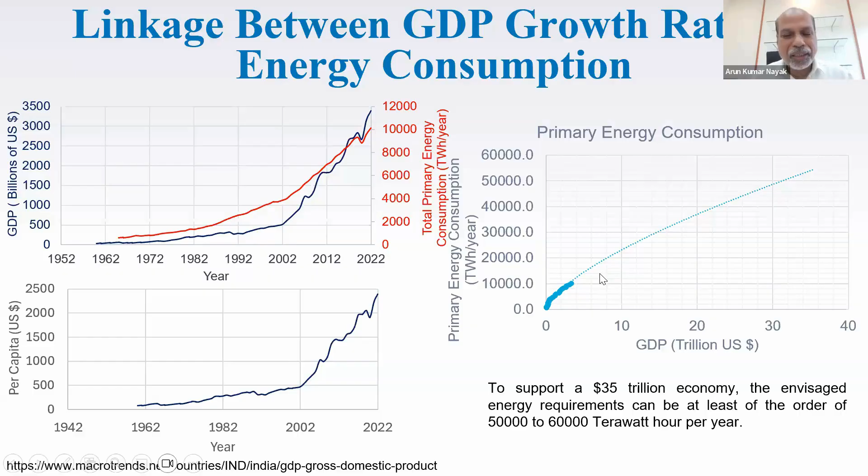If you look historically, no energy consumption has gone without CO2 emissions, and historically the GDP growth rate has also caused proportionate CO2 emissions. Globally, most countries consume even more than 70, 80, 90% of their energy budget from fossil fuels. So this is very critical. Globally we produce something like 60 billion tons of CO2 per year.

And it's well known that by the end of this decade, the 1.5 degrees Celsius limit is likely to be crossed. For the 2 degrees Celsius limit, Mother Earth can maximum accommodate 1150 to 1350 billion tons of CO2. If I divide that by 60, it is hardly 20 years. So 2025 plus 20 is 2047. So 2047 is a very critical year for India.

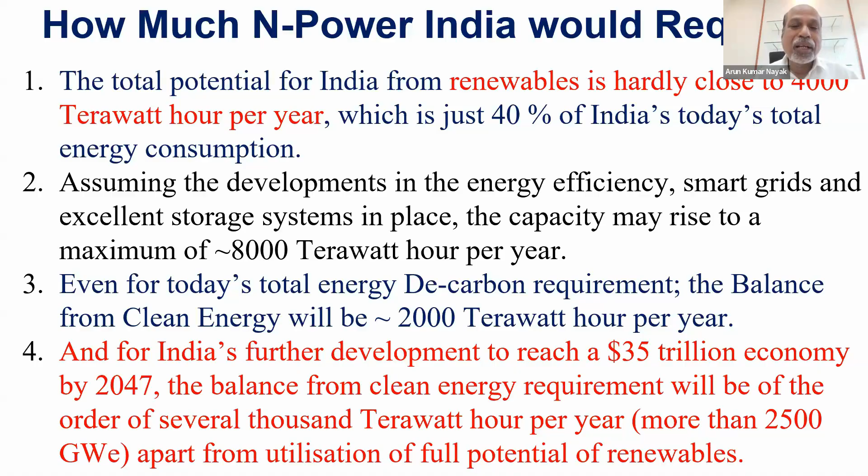It's a gateway to enter into a large scale nuclear power program. And there is a very big thing which is happening also in India. The coal plants, which are the drivers for electricity production today, are retiring too fast. By 2047, assuming the government doesn't create another coal plant in place of coal, roughly 200 gigawatt of coal electricity will be off the grid.

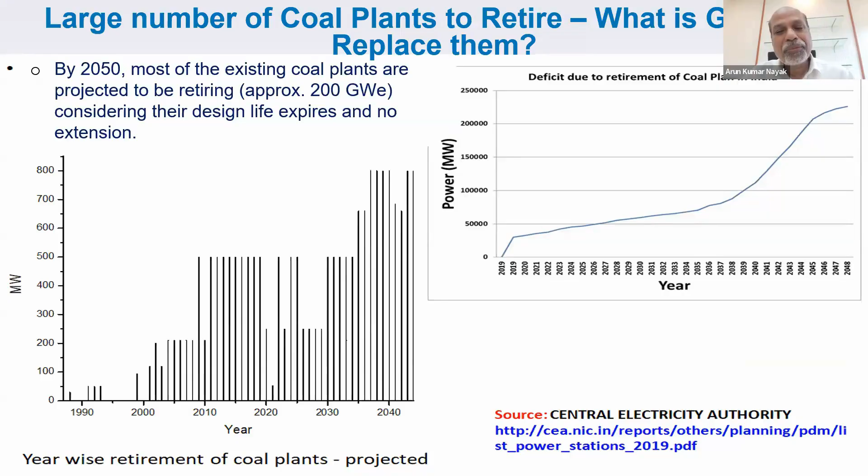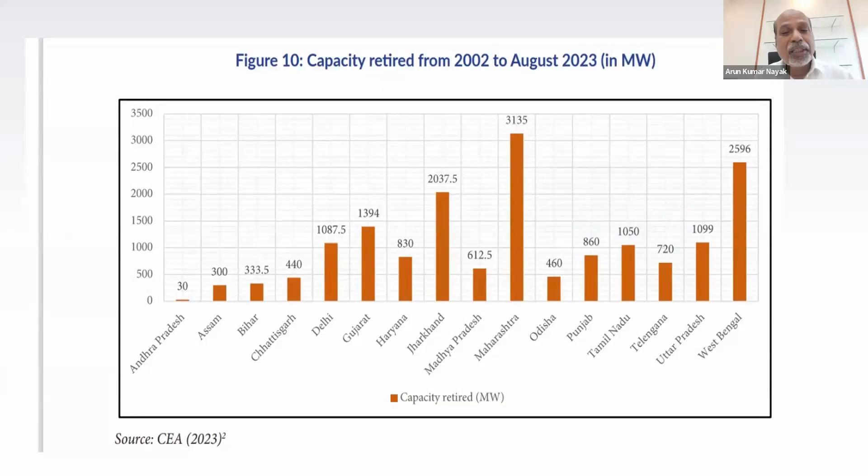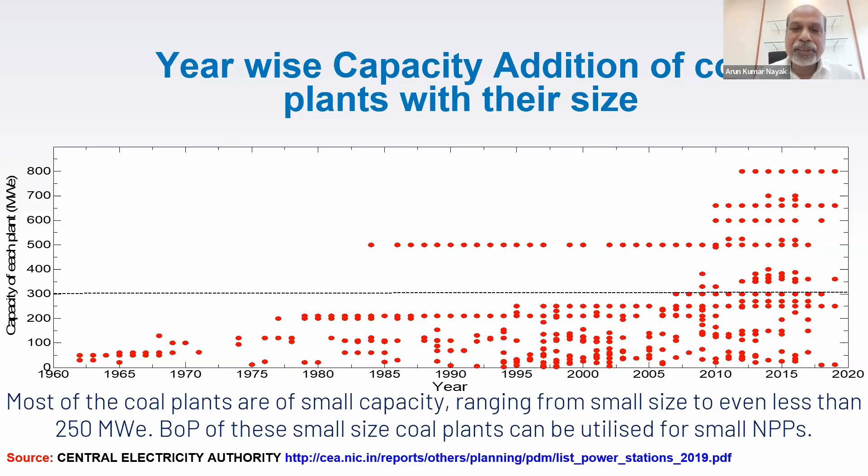This is something we have to understand, and it is not new. Look at states like Maharashtra, West Bengal, Jharkhand, Gujarat — many states, many coal plants have started retiring. More than 20 gigawatt electricity from coal is off the grid today. Most of these coal plants producing power are below 300 megawatt size. Only very recently have large supercritical designs come. Otherwise, large numbers are really very small size.

What is the American strategy doing today? America has surveyed more than 400 coal sites, and found that they could be home to roughly 200 gigawatt of nuclear, which has to be repurposed. Repurposing has a lot of benefit — by retiring them and reusing the infrastructure available there, they could repower, and that could save $275 million per gigawatt. This is something we all have to understand.

At the same time, what the American study shows — apart from the IAEA study — is that there is a good amount of employment generation for each megawatt of power we produce. 2.8 times more employment is created from nuclear as compared to coal.

Apart from this, let's understand what we think of a developed India. Look at the captive power plants which today provide energy to the steel, cement, chemical, metallurgical, mineral, textile, and mining industries. In the last 8 years, the power consumed by them has gone from 40 gigawatt to 80 gigawatt. For a developed India, or Viksit Bharat, the estimate is that power consumption in the captive sector alone could climb to as high as 400 to 500 gigawatt. Today they are mostly powered by coal and diesel. If we remove coal and diesel, only for the captive power sector, we need 400 to 500 gigawatt of nuclear.

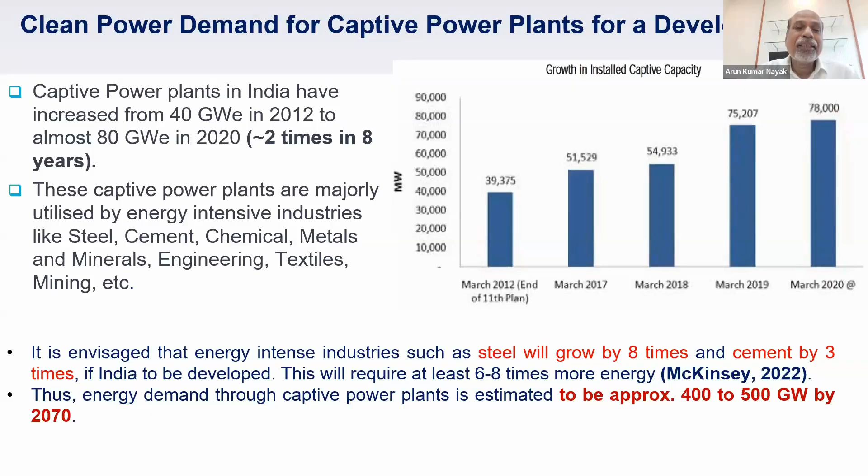Look at the transport sector — this is something I speak about in every forum. Look at America and India: in America, more than 90% of people go by flight; in India, 90% of people are waiting to catch a flight. Same thing with four-wheelers. So the energy consumption required in the transport sector could rise significantly as we move toward a developed India. In my estimate, a modest climb of 3 to 5 times in transport energy would require an energy system the size of India's entire current system, just for the transport sector.

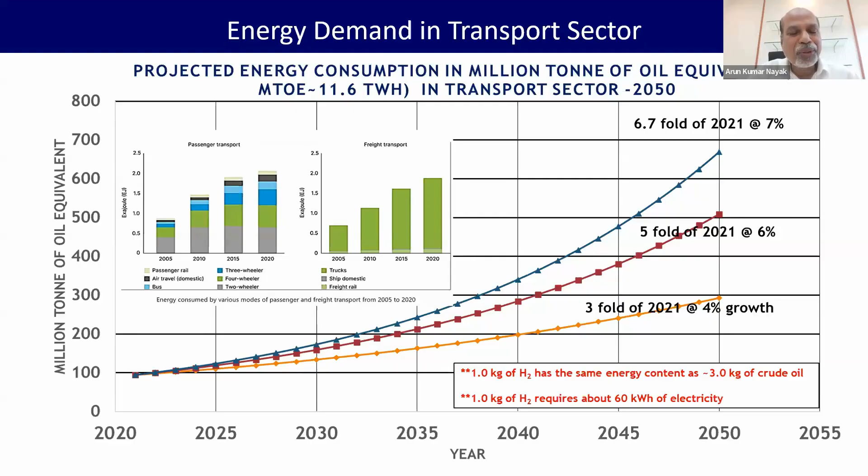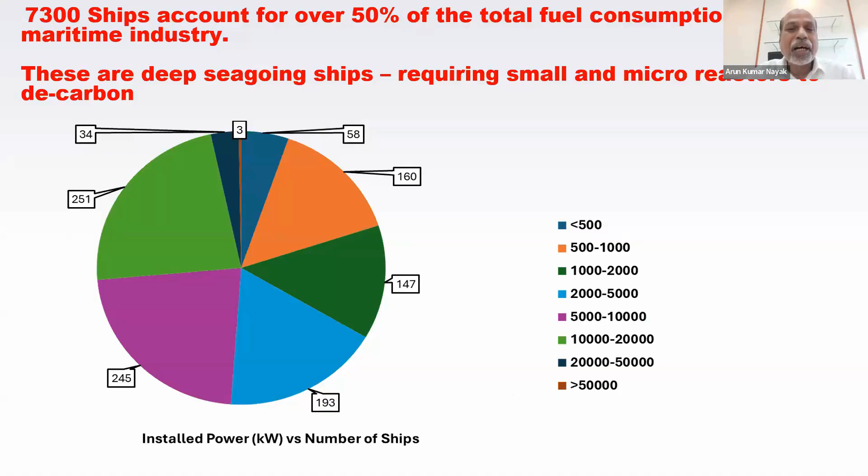Today the transport sector is mostly run by gasoline. If we remove gasoline, what is going to take its place? Either renewables or nuclear, or a combination of both — this is what we have to keep in mind. The other bigger sector in transport is shipping, the cargo ships. Roughly 7,300 cargo ships India is putting on the sea today, and they're all driven by diesel. The Minister of Shipping wants at least 5,000 of them to be decarbonized as soon as possible, using small and micro nuclear reactors.

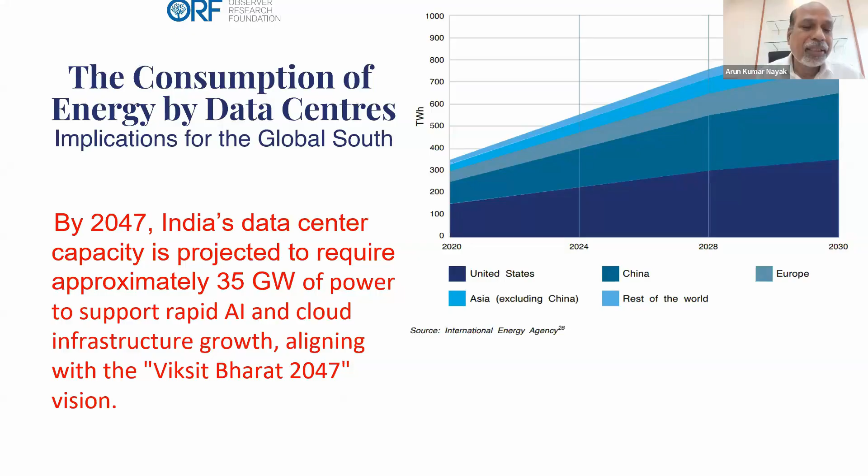AI and data — India wants to climb very fast to be a world leader, especially in AI. AI means power is a guzzler. In just a few years from now, India will require several gigawatts of nuclear power dedicated exclusively for AI and data. This we have to also keep in mind. This is something we all have to worry about.

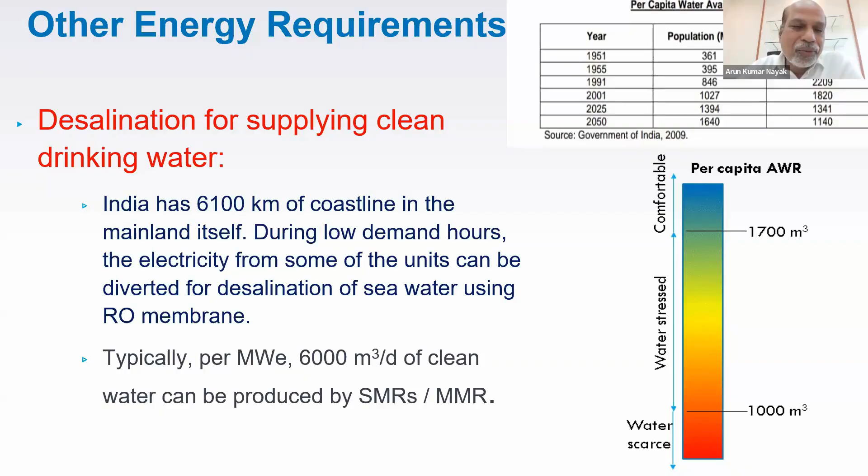In 1951, our population was 361 million, and today we are close to 1,500 million, and by mid-century will be 1,700 million. So the population is climbing almost 5 times from independence till mid-century. But the rain god doesn't increase the amount of water proportionately, so per capita water availability has shrunk exponentially. The UN says India will be water-starved very soon, and ensuring clean drinking water for 1.7 billion people will require a lot of energy — massive energy coming from nuclear.

So nuclear power, where are we?

As we all know, in India today there are hardly 25 nuclear reactors in operation, producing hardly 8.8 gigawatt, which is hardly 57 billion units of energy in an energy basket of 10,000 billion units. This is what we all have to keep in mind.

We are talking about 100 gigawatt by mid of the century, and developed India 2,500 gigawatt. So the future goal is very hard, very tough, very challenging, and we all have to tighten the belt even for 100 gigawatt nuclear power capacity by mid of this century. So what I say, this is a brave and a welcome step in the history of India.

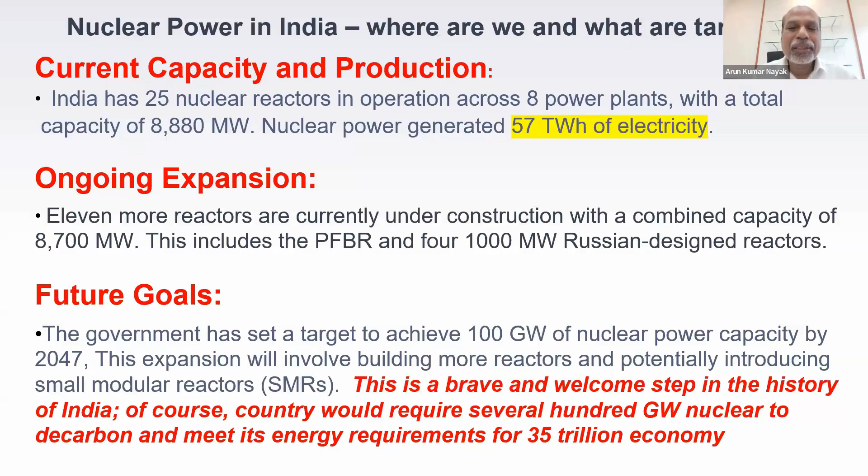This is a brave step by government, giving a big mandate to all of us that we have to climb at least 12 times from the present power production. And once that is climbed, a lot of technologies will be observed and that will accelerate the amount of nuclear power which we are talking about, several hundreds of gigawatt as we move forward.

What are the broader issues for nuclear? Why has it not been able to climb? The most important is the cost. What is the capital cost? The levelized cost of electricity.

Today it is totally government control. Even though the SHANTI bill gives the edge for the private sector to operate, to come, build, own, and operate, the biggest fear amongst the private is the capex or the electricity cost.

And the public is equally concerned about accidents, Chernobyl, Fukushima, radiation leak, cancer. So when we are pushing nuclear, the public mind is still not ready. There is not enough education with them.

The third bigger issue is the fuel supply security. Today we are also importing quite a good amount of uranium from abroad. So the private is totally worried, who is going to give me the nuclear fuel? Am I ensured? And we have a lot of thorium, and when is the thorium really going to come?

Management of nuclear waste - as we all know, each gram of irradiated uranium has to be stored for several hundred thousand years till the decay, till the radiation issues are resolved. So the question is, who is going to store so much waste, and what is the policy and so on.

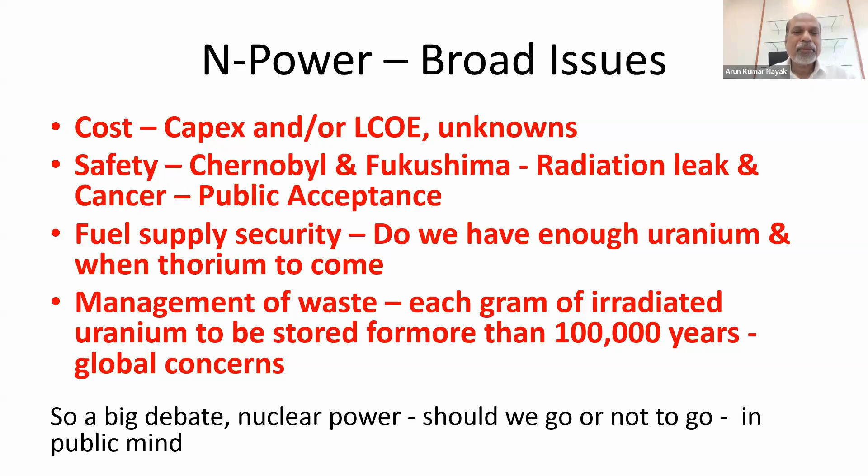Let's look at the technology issues or options for the private industry. Domestically, we have two technologies available. One is historically the PHWRs, the workhorse for India. India has mastered this technology up to 220 and 700 megawatt PHWR.

220 and 700 megawatt PHWRs are operational, lot of experience, supply chain well established, fuel design, fabrication well known, AERB licensing established, safety - it is a generation 3 plus design, especially the 700 megawatt reactor. So safety is well known, proven, and historically there has been no accident until now. These are the trademarks for the Indian PHWR program, which can be offered to the private utilities.

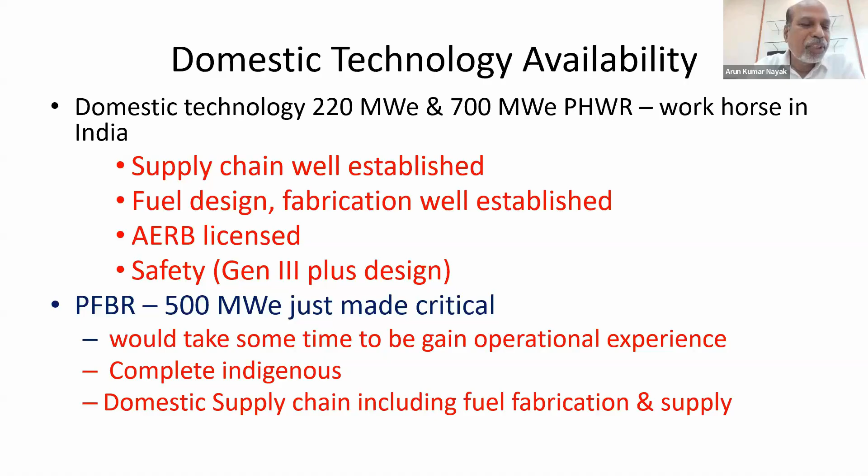And recently, India made history by achieving criticality of the 500 megawatt PFBR - a historic step, and of course it may take some time to gain the operational experience of the fast reactor. This is complete indigenous. And once it is operational, the bigger issue of the waste, the spent fuel, that is going to be resolved, especially because those fuel can be the spent fuel - we can reprocess, take the plutonium and use it in the PFBR.

Advantage for the private is that 100% domestic supply chain exists. The capex is known. The fuel fabrication is known. Everything is known for the PHWR.

PFBR, or in future the commercial fast reactors - the Department of Atomic Energy has to work out how this technology can be offered to a private player because of the use of plutonium in this fuel. Also, these are breeder reactors. So this is something we all have to think of, whether fast reactors can at all be given to the private sector. If yes, when and how.

Imported light water reactors, definitely - apart from the Russian one, the VVER-1000, now the VVER-1200, the private sector has the choice. They can negotiate with Russian, American, French, or even Korean vendors, looking at the techno-commercial viability and the supply chain aspects. These reactors can also be obtained by private utilities. The advantage for them will be the assurance of fuel supply by these vendors.

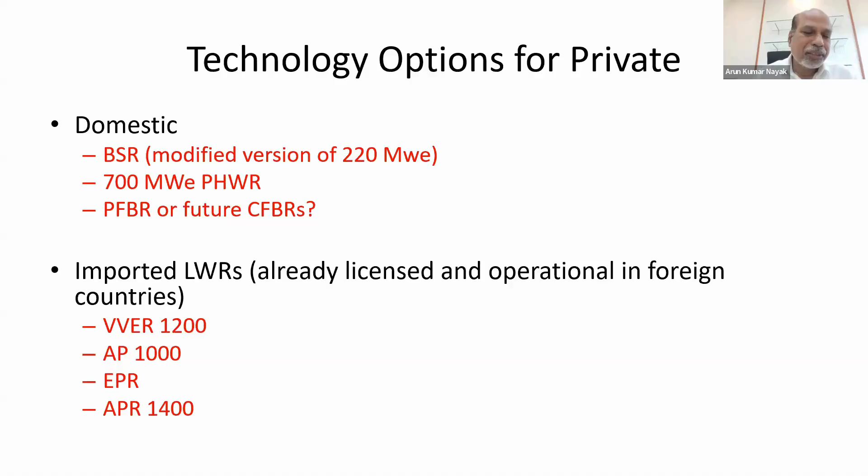But there are certain constraints or fears in the minds of private operators, especially since none of them, including PSU and NTPC, have any experience in nuclear reactor design, project, construction, licensing, operation, or maintenance. So entering into the nuclear sector, which involves highly advanced technology, they definitely require hand-holding.

The question is, who is going to provide this hand-holding, and to what extent? Will NPCIL give support, how much will they give, or who else is going to help them, and to what degree? This is a big question.

Foreign suppliers may give end-to-end delivery like a turnkey project, but the cost will be very high, and it's unclear whether the private sector is ready. For nuclear financing, many venture capitals today are ready to invest, but they don't have experience, especially knowing when to invest, how much to invest, and when they will get the return. These are unknown factors in the market.

The levelized cost of electricity is not well known to the private sector, because until now, the back end of the fuel cycle has never been considered in the LCOE.

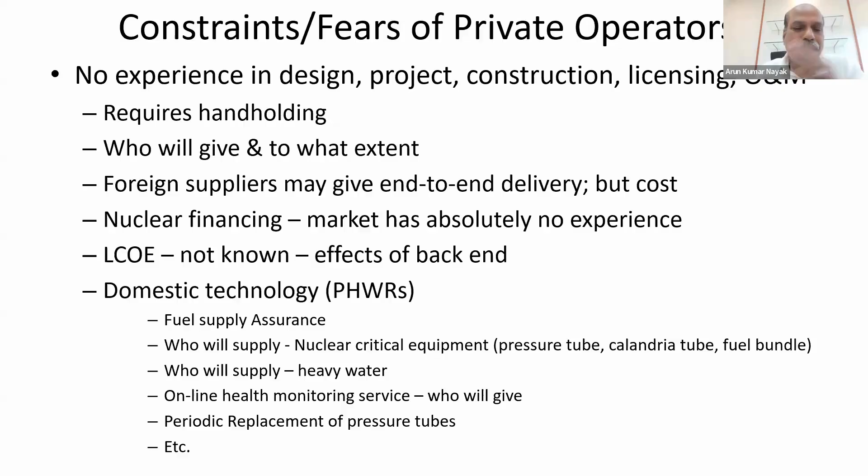Who will supply the heavy water? And who will do the online health monitoring of the pressure tubes? This is critical for PHWRs, along with periodic replacement of pressure tubes every 10 to 15 years. Who is going to do that, and who is taking the responsibility? The list can go on.

So implementation of 100 gigawatt, in my opinion, would require some dedicated setup or special purpose vehicle, especially to arrange and guide new entrants in the nuclear sector. This would help them with the right technology, siting, fuel supply, heavy water supply, critical nuclear equipment supply, localization, supply chain, nuclear financing, licensing, AERB authorization, international partnership, human resource development, training, radioactive waste management, small modular reactor technology innovations, deployment, investment, collaboration, and implementation for nuclear security and safeguards. This is something we need in the government to help private players or NTPC accelerate nuclear power. Let's have a break for question and answer, then we'll move forward.

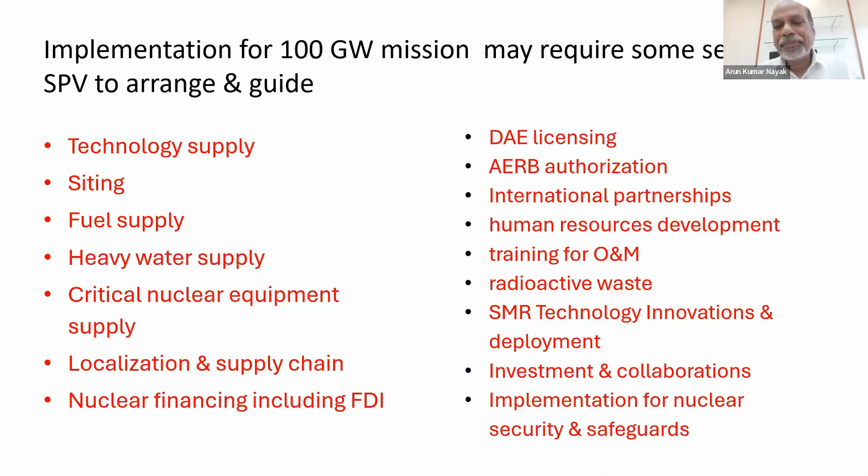Thank you, that was a wonderful build up of the program. You nicely laid out the requirement for nuclear energy, for clean energy, and keeping up with the CO2 emission cap. And as you pointed out, there are safety issues, but we'll come back to that at the end of the lecture after the second half.

Before we continue, as people are typing in questions, I want to quickly say something about nuclear fission. This whole field of nuclear energy started with the discovery of fission. One major point is that in chemical reactions you only get energies on the scale of electron volts, whereas the nucleus gives mega electron volts.

I'll tell a small story here. Otto Hahn and Lise Meitner discovered fission together, and it was a long journey to find the answer. When they finally found it towards the end of 1938, Lise Meitner was already out of Germany. Some of you may know this story, but it's a wonderful story of scientific endeavor, so I want to repeat it.

She was out on a walk in the Christmas break with her nephew, who was a physicist. She had received a letter from Otto Hahn saying that what he discovered as a product of neutron bombardment on uranium was definitely barium and not radium. During this snow walk, while pondering over the letter, she sat on a tree trunk, and the idea came to her that a neutron hitting uranium gives enough energy that uranium breaks into two nearly equal parts.

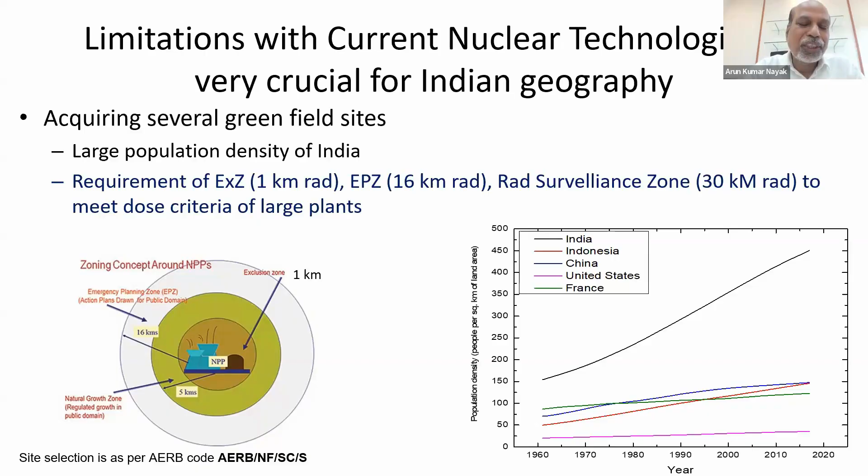Other issue: suppose we are talking about a 1,000 megawatt reactor, the project cost is very high. For example, with a modest 25 crore per megawatt, 2 units will cost 50,000 crore. Most of the very big private industries say we don't have such big pockets for putting 50,000 crore to build 2 nuclear reactors. This is one of the things we all have to understand.

So there's large investment because the size of the reactor is very large, and there is a lot of delay in construction, primarily because these are not modular. There are delays in the supply chain, some components come today, some don't. So construction delays are part of the game, and that causes almost 30 to 40% as interest during construction.

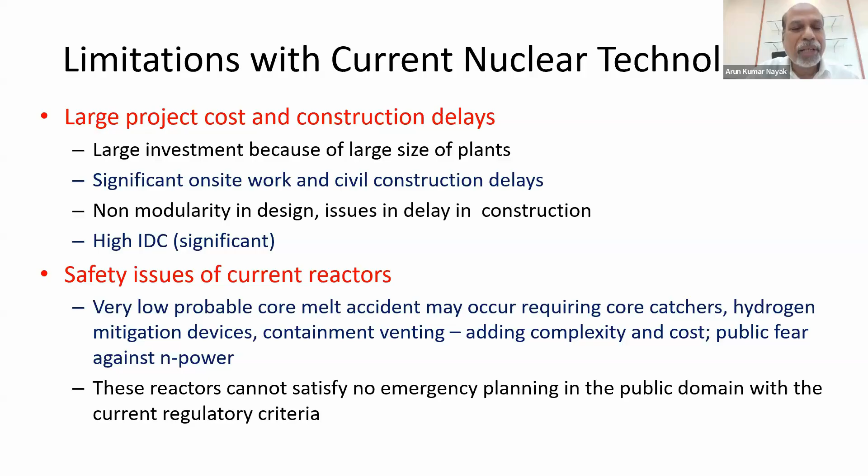Safety, I said, is excellent, but a low probability core melt accident may still occur. That's why most modern plants require core catchers, hydrogen mitigation devices, containment venting, and these numbers keep increasing, adding complexity and cost. The moment you say core melt, there is public fear in mind. That's why these reactors cannot satisfy the goal of no emergency planning - we always need emergency planning in the public domain.

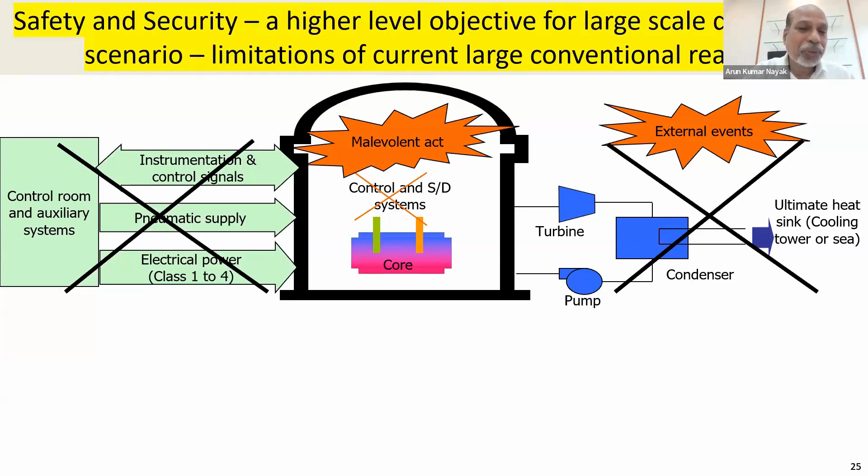Another very important factor, especially after the recent war, is safety and security - two very important aspects. Security means any external attack or internal malevolent act. A terrorist may enter the control room and try to jeopardize something, or there could be an external drone attack, missile attack, or rocket attack. We all have to be sure the reactor containment is safe enough to safeguard the plant, and whether the instrumentation control system works, the cooling system is available or not, safety has to be assured. This is something new nuclear reactors have to implement.

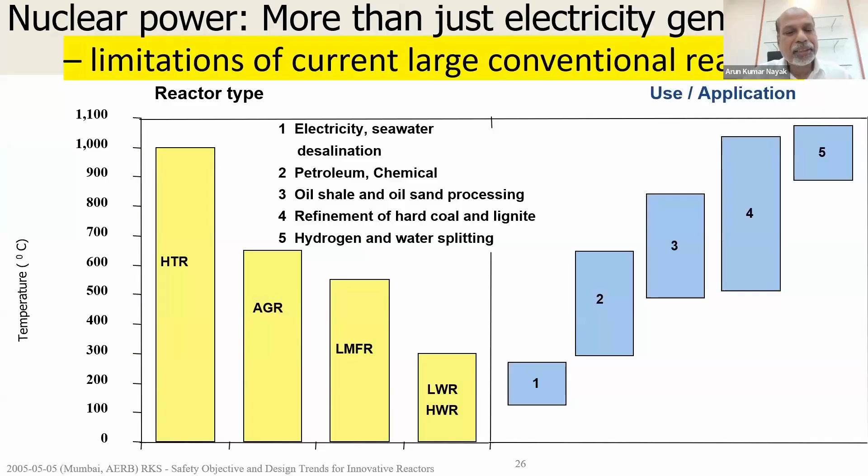Third thing is nuclear energy is not just for electricity production. Most industries today require heat or temperature, not electricity, because if you give them electricity they have to convert it back to heat. Towards that, new generation technologies like high temperature reactors, gas cooled reactors, and fast reactors have much, much higher temperatures than the classical PHWRs or light water reactors.

This is where the small modular reactors take a new game changer. Small modular reactors, size is small, power is below 300 megawatt. Modular because it is a factory assembled reactor, plug and play type. And reactor, fission energy is going to be transported here.

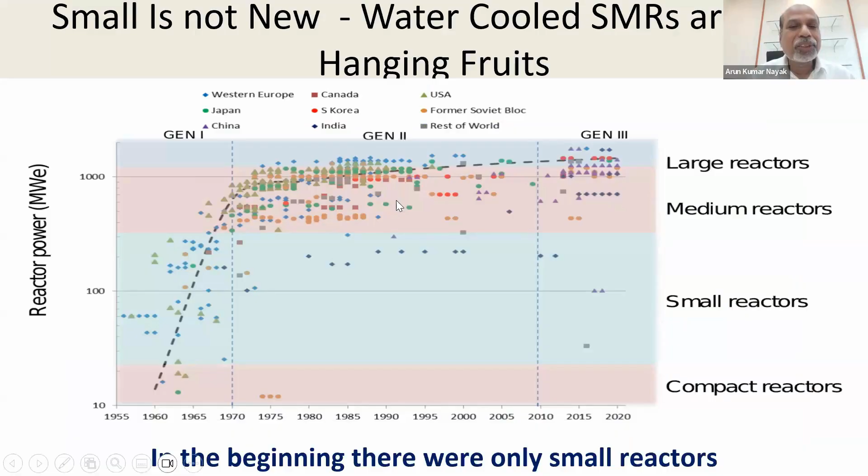But this technology is definitely different from the classical technologies which I described. Small is not new. In fact, the nuclear industry started only with small reactors. These are called the generation 1 and 2 reactors. Then there was thinking that we have to go for economy of scales, that's why the large reactors came. Otherwise, the industry has several years of experience designing, fabricating, operating small nuclear reactors.

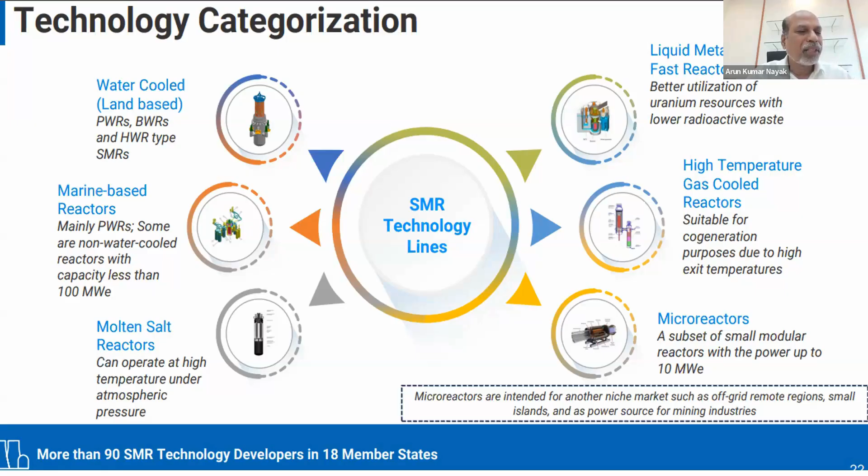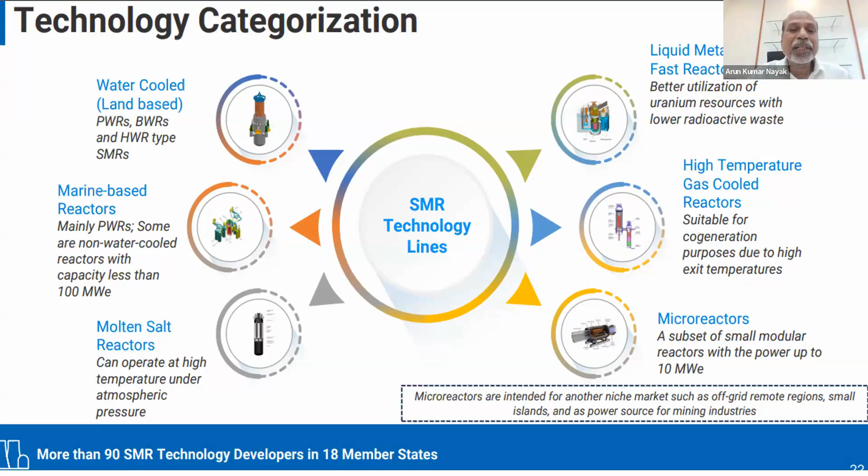What are these SMR technologies people are talking about today? Apart from the classical water-cooled land-based reactors, which include the heavy water reactors, BWRs and PWRs, and also for marine applications, which I just spoke about, 5,000 ships waiting for decarbonization. Similarly, advanced technologies like molten salt reactors, liquid metal cooled reactors, or high temperature reactors, including micro reactors sized less than 10 megawatt. These are something which are in design stage or some are in advanced stage for deployment.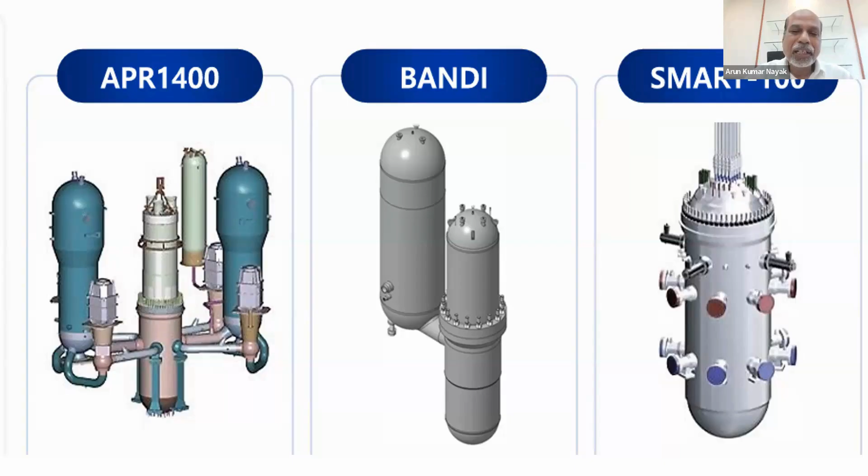There are no pipes in this. As a result, there is nothing called a break or a loss of coolant accident, which can cause accidents like what we saw in, for example, TMI or Fukushima.

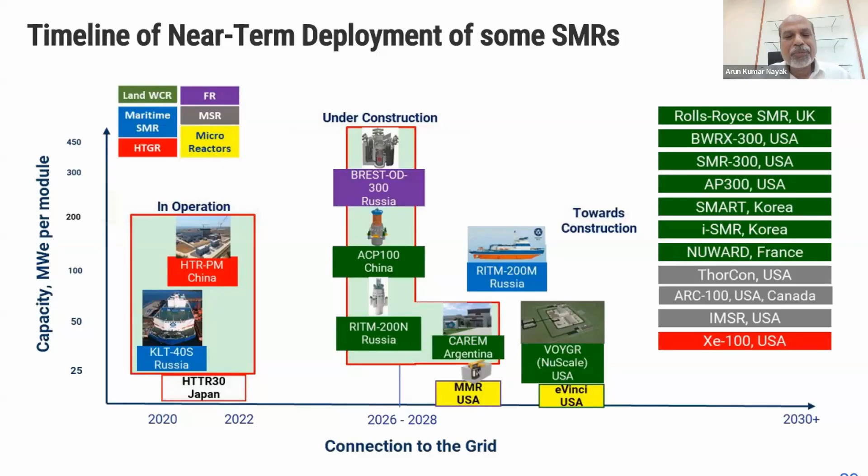And what are the timelines for deployment of these SMRs? Some are already in the advanced stage of deployment. Some are in operation. For example, the KLT-40 in Russia is already in the sea, operational. Japan's high temperature reactor is 30 megawatt size, operational. Chinese HTR-PM, which is a small size reactor, is already operational. Many are under construction, and some are going to be constructed in future.

How do the SMRs address the issues I spoke about, especially no emergency planning requirement? One very important factor we all have to understand is that since the size of the reactor is small, the radioactivity inventory is small. Plus, because everything is packed inside the vessel, there is no question of accidents like classical PWRs or BWRs experience.

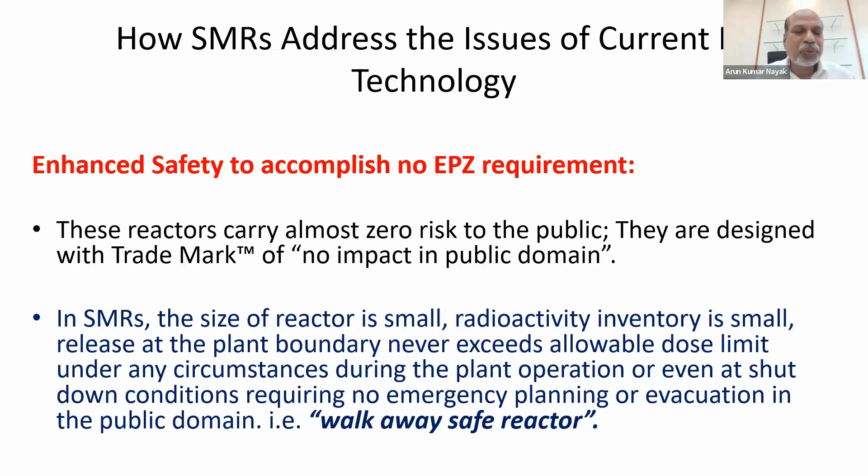As a result, there is no question of any radioactivity leak of magnitude which can cause an offsite emergency. So that is why these are tagged as walk-away safe reactors. In the sense, if any accident occurs, the operator can go home and take care of his family rather than taking care of his reactor. It will come to a safe condition on its own.

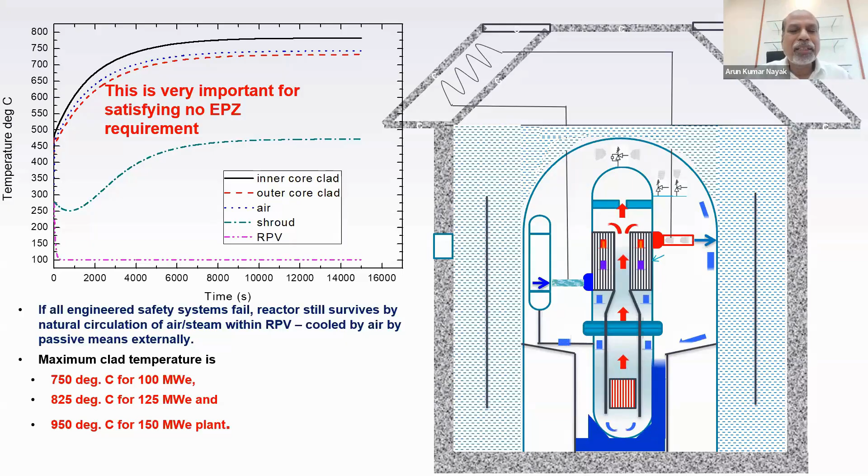One of the things, I myself had designed a 100 megawatt classical SMR, and if you see all the safety systems, even in a fault scenario, the maximum temperature the fuel sees is hardly 750 degrees Celsius, which is well below the melting point temperature of the uranium fuel. So this is where the SMR's safety comes into picture.

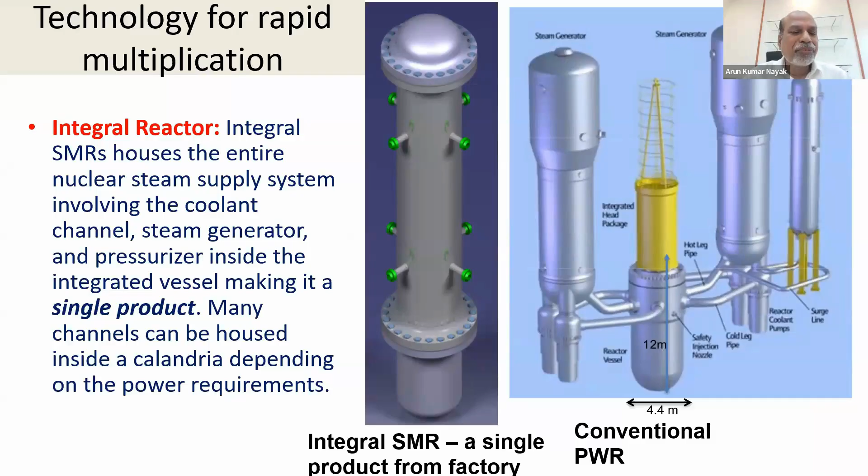And because these are integral reactors, this can be factory assembled as a single product, not like a conventional reactor. So many can be built in a factory and come for direct deployment. So this can have a rapid multiplication factor.

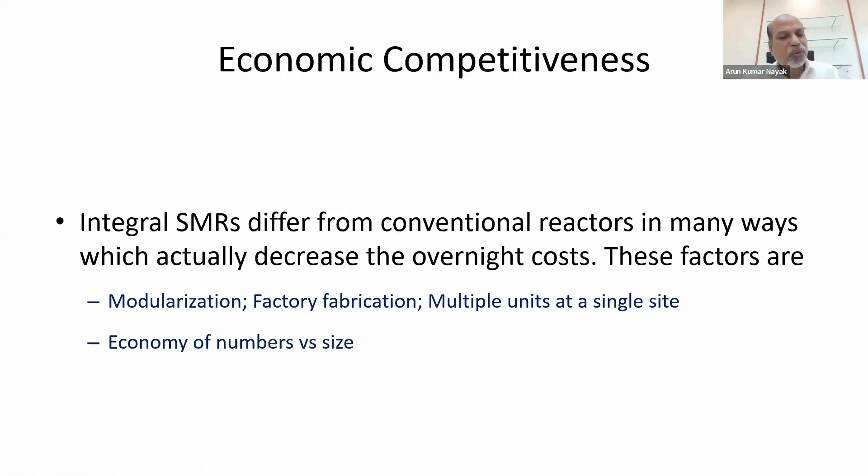Economic competitiveness comes from two aspects. One is the economy of numbers rather than size, and factory fabrication and modularization, as a result of which there are a lot of advantages, especially to new entrants. Suppose you talk about a 100 megawatt or 300 megawatt reactor, the amount of money they're investing is much smaller than the 30,000 crore which I mentioned.

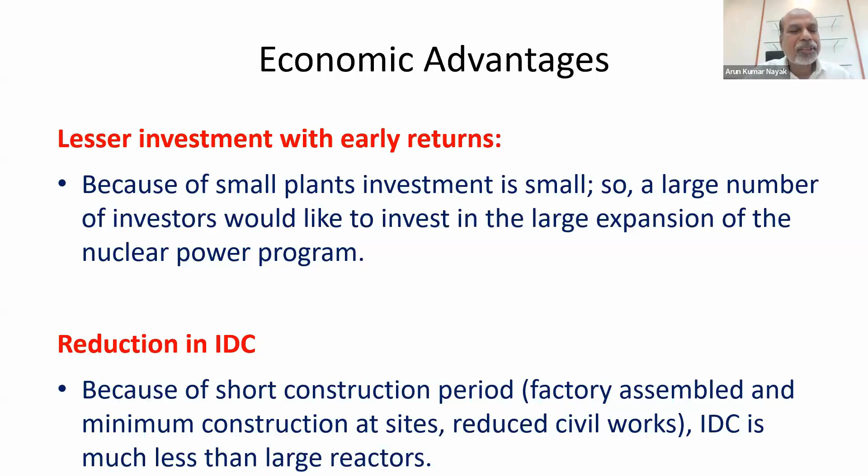So the pocket of these new entrants is sufficient enough to invest in these reactors. Because these are factory assembled reactors, the interest during construction doesn't happen, as a result of which this has economic merit. A lot of calculation has happened on this worldwide. The OECD calculation shows that even for a first unit, in Indian terms, the electricity cost could be 5 rupees 30 paisa per unit. And if you go for large numbers, it can be well below 5 rupees per unit.

For India, the next two slides are very critical. Whether we import these reactors from abroad or domestically design and manufacture them, there are a few things we have to keep in mind.

100% localization we have to keep in mind. That means all equipment components we should be able to manufacture in India. That only can bring down the cost.

These SMRs are not the candidates for greenfield sites. Greenfield sites will be kept only for the large conventional reactors. These SMRs will target exclusively repurposing coal plants. Coal plants are in interior India, so equipment has to be transported by rail or road. That's why the size has to be smaller.

Third thing is we have to ensure by design that under no conditions core heat up is possible. And that is why there is no requirement of any exclusion zone or emergency planning zone. The plant boundary becomes the boundary of the reactor.

There are a few other things to keep in mind. The design should be good enough that it can be sited anywhere. One important parameter for that is the seismic design basis. Classical large reactors cannot be put in a high seismic region. If you look at a coal plant, either it is sitting in a high seismic region or near a fault. So the design basis for seismic conditions for these SMRs has to be much higher.

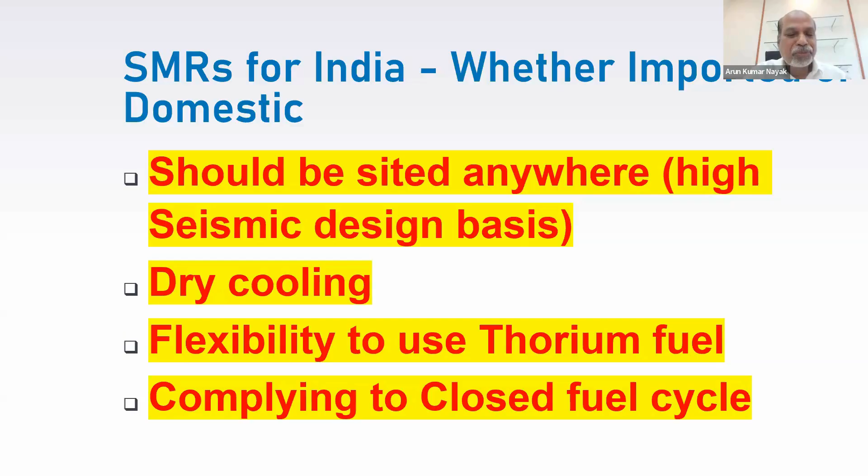As you go into interior India, getting river water or lake water is not possible because no state government will allow touching their water body for nuclear purposes. So dry cooling is a must. And as I've been saying, thorium has to be flexible enough to use, and most important is complying with India's closed fuel cycle.

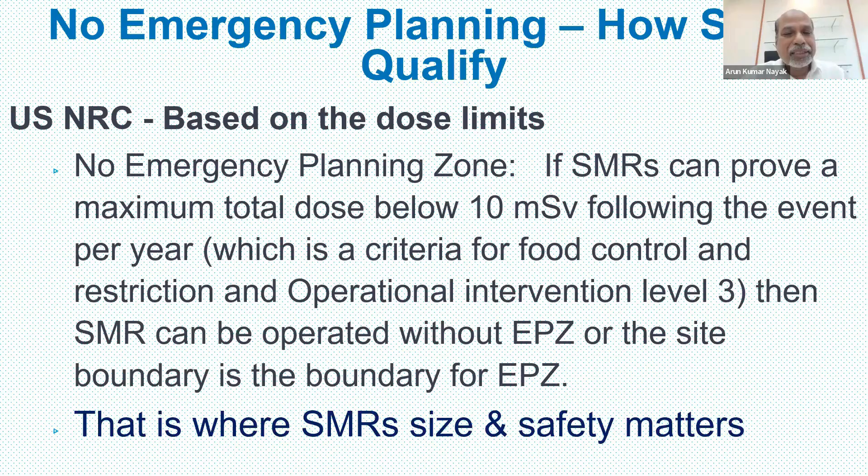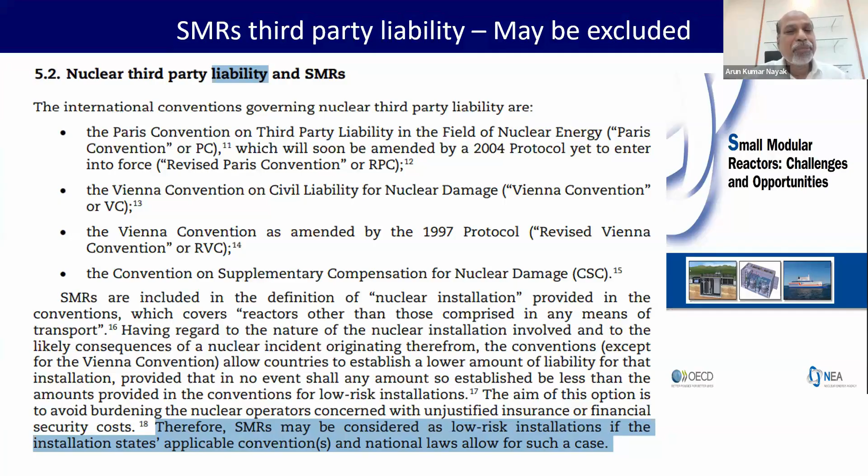What has the US NRC done? This is something I want to sensitize all listeners to, especially for SMRs, so that they don't require any emergency planning zone. They've put a dose-based criteria that under no condition, if the SMR can prove maximum total dose below 10 millisievert that a public person can experience outside the plant boundary, then it doesn't require any emergency planning zone. This is where I'm saying SMR design has to be completely different from classical large reactor design. Because it is so safe, even OECD countries are now planning to keep SMRs away from liability. Third party liability may be excluded for SMRs and microreactors.

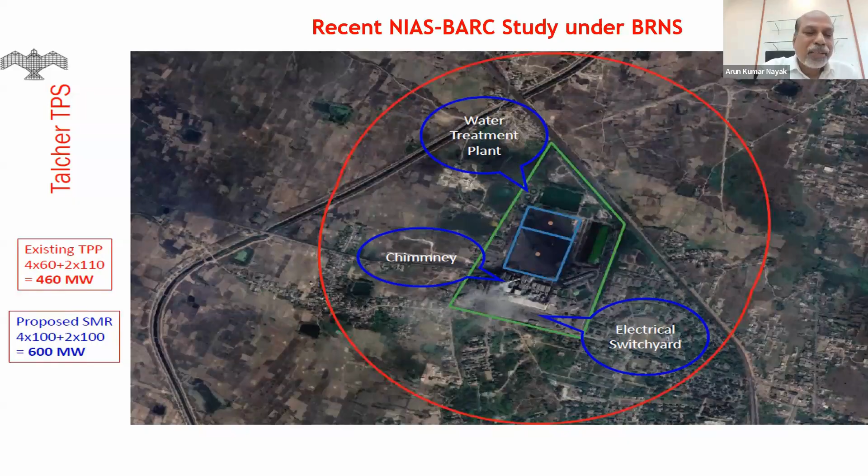What I did a few years back, I tried to map the SMRs, especially in coal plants of India for repurposing. Some I'm going to show here. Talcher Thermal Power Station produced 460 megawatt and has retired. In the same site, if SMRs can be put, it can produce 600 megawatt.

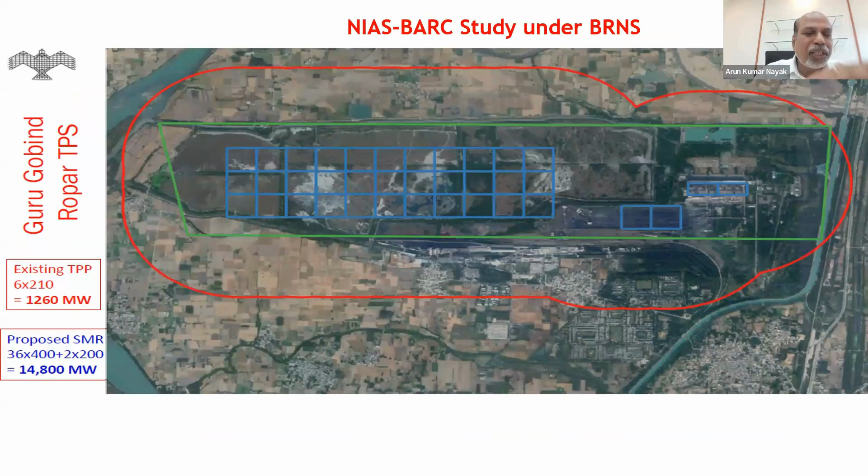Guru Gobind Singh Ropar Thermal Power Station produces 1260 megawatt. In the same site, I found an SMR park can be built of 14,800 megawatt. Nalco today consumes almost 1200 megawatt of coal to support its aluminum production. In the same site, I myself mapped and found that 1200 megawatt coal can be repurposed with SMRs.

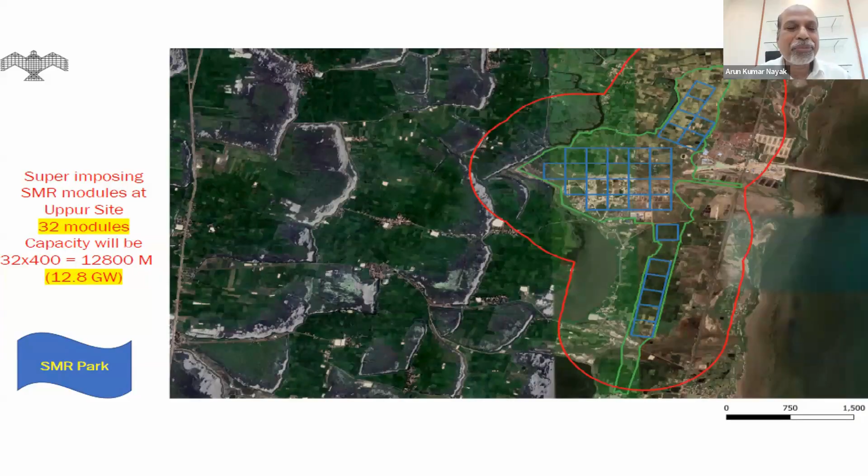South of India, there is a place called Uppur in Tamil Nadu. Once upon a time this site was given to NTPC to produce coal power, but for some reason this site could not be utilized. I mapped it and found that 12,800 megawatt of SMRs can be built here. There are many such stories, I don't want to go into detail. What I want to say is that SMRs can repurpose most of the retiring coal plants because there are several advantages.

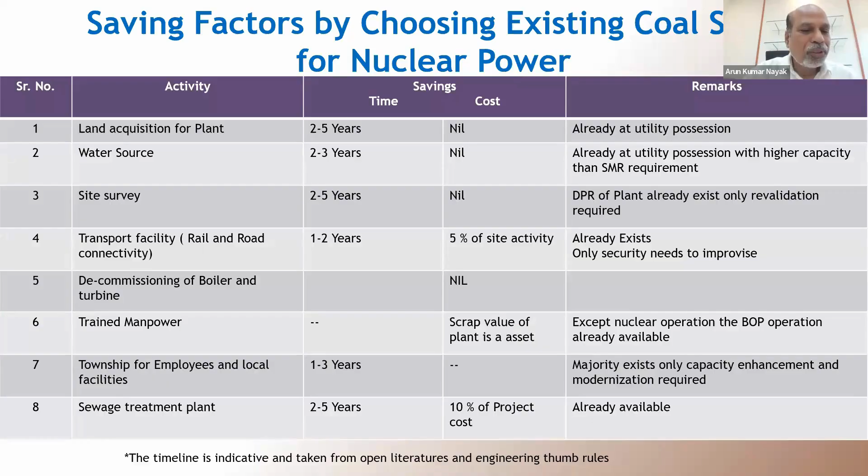One is land acquisition, we don't have to do that. Land is available, water body is available, site survey is completed, transport facility available, trained manpower is available, township is available. All these things will yield not only faster deployment of repurposing coal to nuclear, but also produce much more power than what coal was giving.

Apart from the classical SMRs I've spoken about, there is time to look more into smaller size microreactors of the order of 10, 20 megawatt. What is America doing? America is targeting exclusively for data centers, maritime industries, malls, hospitals, airports, across national highway corridors for hydrogen production. This is something we have to think differently about. Several thousand cargo ships need small size power, 10 to 50 megawatt size, we have to look into that.

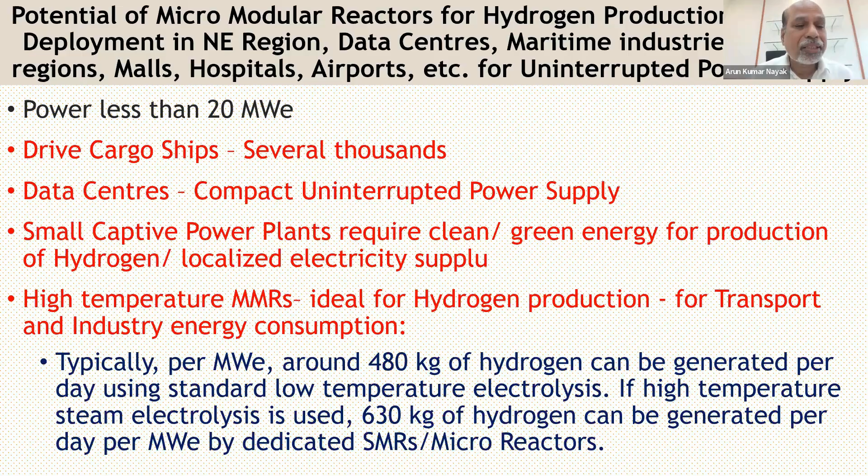Data centers will require uninterrupted power supply from microreactors, hydrogen production and so on. This is something a big industry can happen exclusively from microreactors. Most important, look at our northeast region, which is sitting on the Himalayan region. Classical large reactors cannot be put there. Even SMRs are difficult. I believe that region can be repurposed exclusively for microreactors.

Going to 2500 gigawatt as we move forward itself causes investment of $6 to $7 trillion, 1.5 times today's total India's GDP. And that will create millions of direct and indirect employment, apart from a lot of CSR activities. I believe a big transformation for Indian industry and Indian society is on the horizon.

Look, there is a big concern. What is the fuel? This is where Bhabha started the three-stage program. He understood we have very limited uranium, hardly 30 to 40,000 tons, which can support hardly 10 gigawatt nuclear electricity from PHWRs. And the first step has matured.

That's why he went to the second stage, that is basically reprocessing of the spent fuel, taking out the plutonium. And look, the second stage alone can give us 400 to 500 gigawatt nuclear, a huge amount of power is envisaged from the second stage.

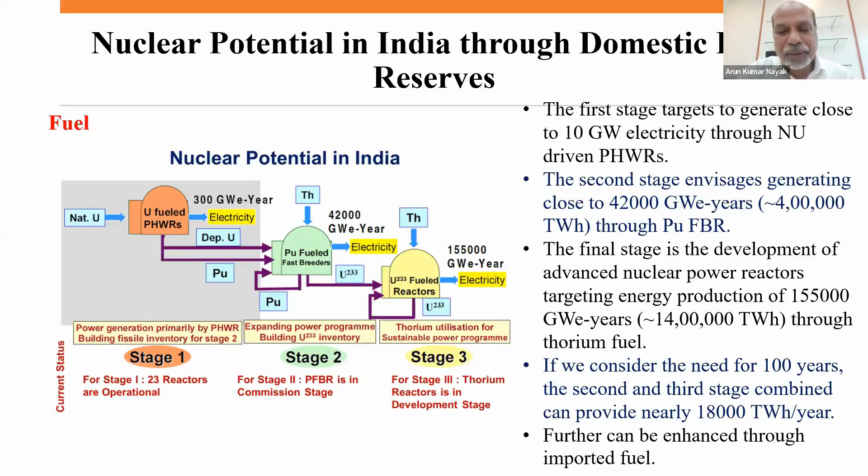And if you go to the third stage, where we burn thorium and uranium-233, that alone gives more than 1600 gigawatt. So together, my estimate shows almost 1800 gigawatt nuclear, or much more, can happen only from our indigenous fuel without looking for fuel outside. Today we are importing fuel. The numbers can definitely go up provided the technologies are available to us.

Why are PHWRs relevant today? PHWRs have very beautiful characteristics. Most important is safety. It's a reactor where natural uranium is the fuel, so there is no added reactivity in that. Inherently the fuel is safe.

Most important, the fuel is sitting on a huge amount of water, the moderator, as well as the calandria vault water. It takes several hours, several days for this water to be lost, and that is where the safety scores. Today, if you ask which is the safest reactor operational in the world, the score comes for PHWR.

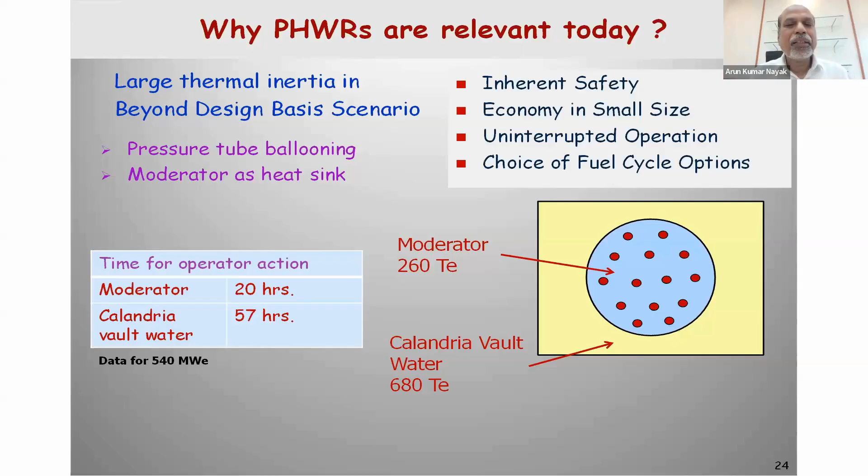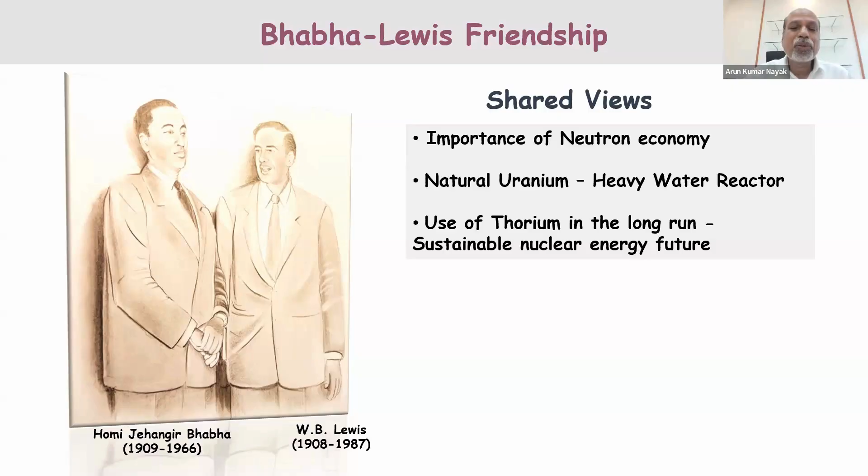That is how the wisdom of Bhabha came. Bhabha and Lewis, most of you probably know, W.B. Lewis is called the father of Candu technology, the PHWR technology. Bhabha and Lewis were good friends, and since the days they were doing PhD, they had shared many things. The importance of neutron economy, natural uranium — Bhabha knew how important natural uranium and the heavy water reactor technology were. Both of them shared a lot of opinions about thorium in the long run, and also developed a sustainable nuclear energy future.

Let me cite a few things. That is Wilfrid Lewis, who is called the father of Candu. He has written books and books, especially on thorium use. A very beautiful thing I'm citing here: in a Candu reactor, in a single pass, thorium LEU fuel cycle increases uranium utilization by up to 30% relative to natural uranium fuel, and would provide a low-cost insurance policy against future shortage of uranium, as well as provide a bridge to the closed thorium fuel cycles of the future.

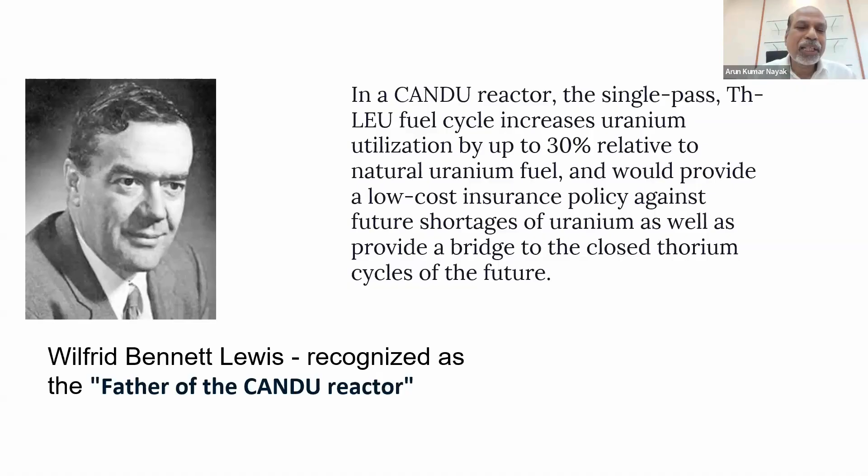And he is the mastermind of the thorium cycle called the Value Breeder, the uranium-thorium cycle. There has been a lot of debate, that's why I put these slides. What is that Value Breeder concept?

He talks about the fuel composition, using thorium along with plutonium or enriched uranium-235 to initiate the cycle. The gain because of the breeding which is happening by converting thorium to uranium-233 — about 40% of the power, according to him, is derived from this bred uranium-233.

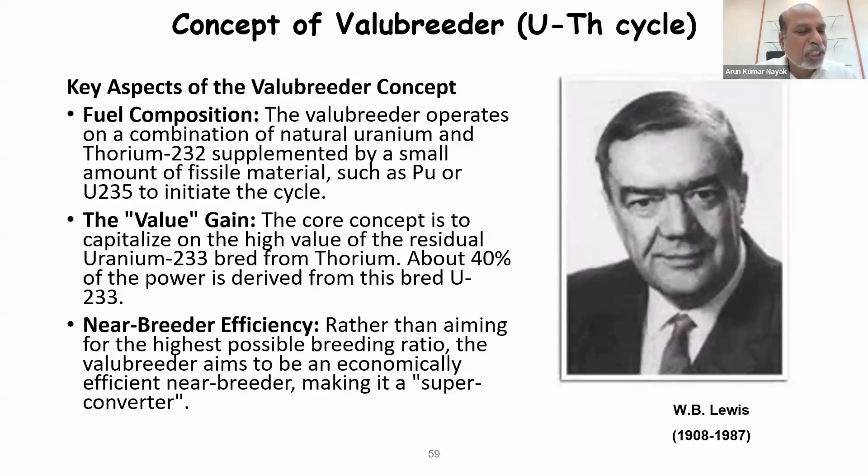And near-breeder efficiency is something we all have to understand. Rather than aiming for the highest possible breeding ratio, the valubreeder aims to be an economically efficient near-breeder, making it a super converter.

There is a report which I just saw from STEP. They have done a lot of calculations on this. For example, if we use a classical PHWR of 1 gigawatt, today it consumes 130 to 150 tons of natural uranium, and it produces 450 to 500 kg of plutonium.

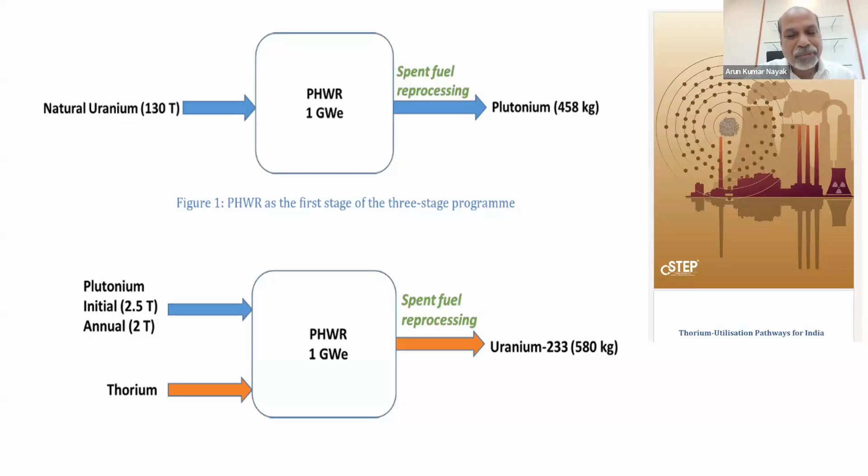The same PHWR, with flexibility, we can also use 2.5 tons of plutonium initially and thorium — it can produce 580 kg of uranium-233, which is a fissile material. Same reactor, we can put natural uranium 110 tons, slightly enriched uranium at 1.1% for 50 tons, and thorium, and it can yield plutonium 115 kg and uranium-233 180 kg.

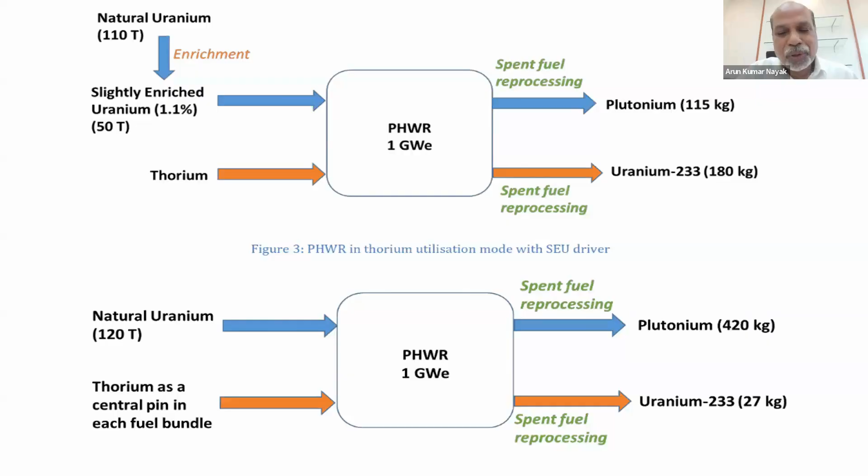Same reactor of 1 gigawatt, if you put 110-120 tons of natural uranium and thorium, as we are doing today in classical PHWRs, this will not only produce plutonium 420 kg, but also uranium-233 27 kg. Even PHWRs with uranium-233 initial and thorium can cause a self-sustained equilibrium thorium cycle. This is possible — one has to really do a design assessment. Probably some design changes may be required, which I don't know exactly today.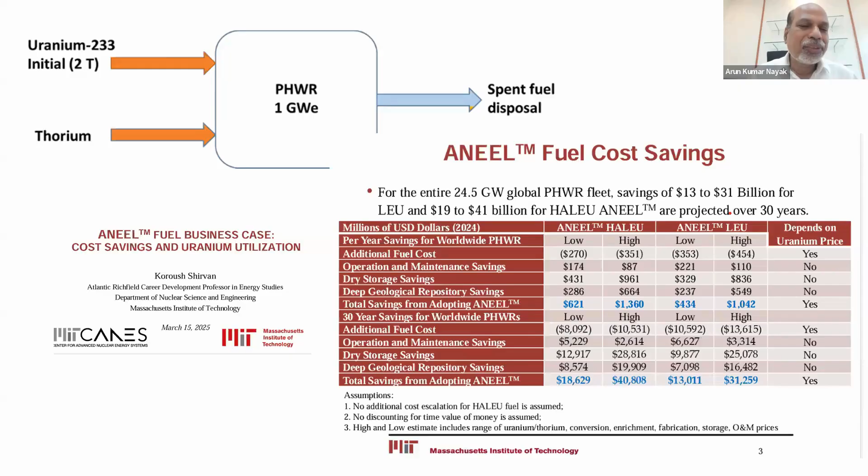This gives us a good room to assess how good thorium is to induct at the beginning of the cycle. So accelerating thorium deployment, there are alternate ways. Even apart from the classical three-stage program, one can look for PHWRs, whether it's a BSR 700 megawatt, ANEEL fuel, or other fuel compositions, which I see have to be established. Probably they may require some design changes that need to be done.

AHWR was designed with thorium. It has the potential to be converted to an SMR. It is a 300 megawatt reactor designed for no impact in the public domain. In fact, this reactor was designed to be put in the heart of a city like Mumbai. It's time to rethink about AHWR.

Accelerator driven subcritical system - this is something where thorium can be utilized in PHWR with external neutrons. But all these things will require a lot of work, especially the thorium front end and back end, which we have to do. Apart from this, advanced SMRs, microreactors using thorium - not only India is doing, but across the world people are working on, especially China, America, Russia.

They're in advanced stages. Some are already operating MSBRs, gas-cooled reactors, and other hybrid technologies in operational stages, which we have to think about how to bring, especially through private entities, and scale it up to the right size with domestic manufacturers. What I say is Indianize those technologies so that cost comes down.

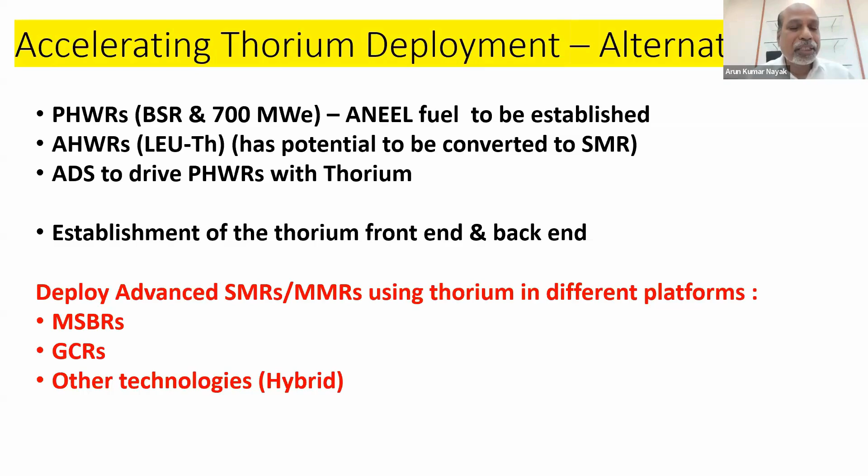So the task ahead for all of us: first is technology vendor establishment, fuel supply, fuel fabrication we have to do in India, otherwise we have to be dependent always on outside. The supply chain needs to be developed and established. Financing model has to be established. Licensing - today we have only licensed PWRs, or I'll say VVERs and FBRs.

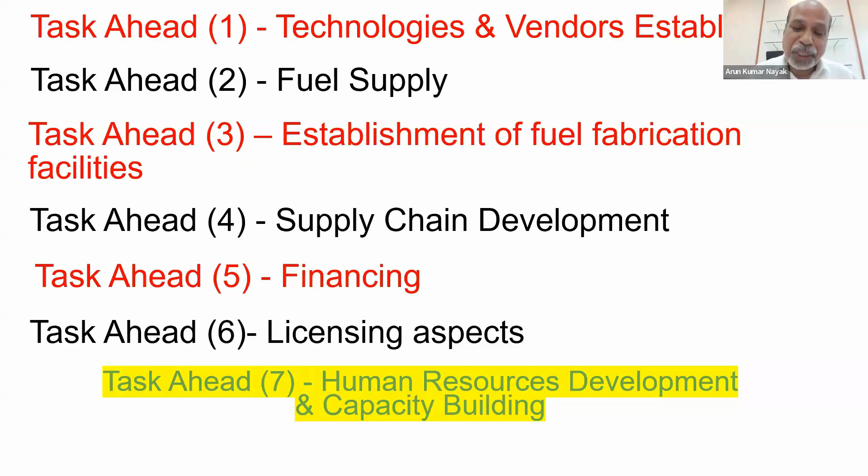But we have to think about new technologies, especially SMRs. And last but not least, 100 gigawatt nuclear power will require several thousands of trained manpower. This is where human resource development and capacity building has to happen.

My strategy for nuclear deployment - this is the question. First thing, very emotionally I put as strategy one: each state must give land to build one or two nuclear parks. It's a responsibility for each Indian. And that way we can produce 20 gigawatt per state, and this 100 gigawatt emotional thing can be resolved in the next 5 years.

Strategy two: replace all brownfield sites and captive sites by SMRs, which has the potential to produce 2 to 5 times more electricity than what coal was producing.

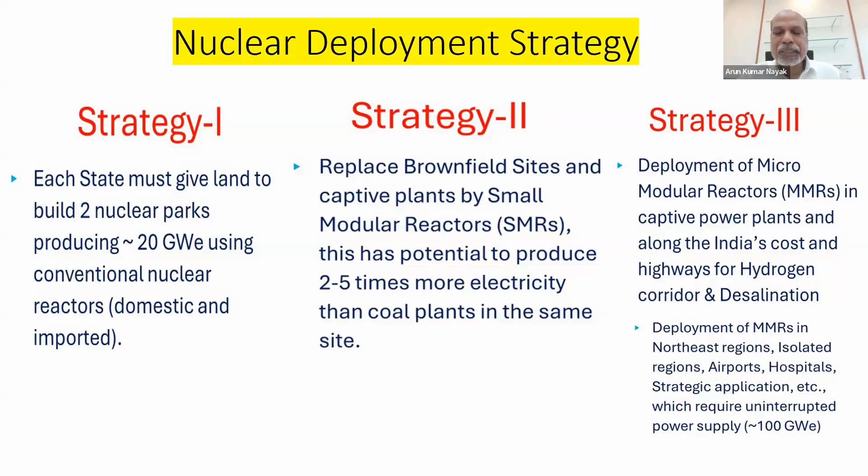Strategy three is putting micro modular reactors in captive power sites and along India's coast highways for hydrogen corridor, desalination, and most importantly, we have to think of putting them in Northeast regions, isolated regions, airports, hospitals, and strategic applications. This is something we have put right now today.

How has the Shanti Bill helped? Shanti Bill is really a breakthrough in India's transition to 100 gigawatt. It enables private, central, state PSUs to build, own, operate, including decommission nuclear power plants. Private funding, including FDI, which very recently government allowed up to a certain percentage, is possible now in nuclear power growth. Any industry can import, fabricate the fuel, so the burden on government is significantly removed.

Collaboration with foreign entities to deploy reactors of Gen 3 plus, Gen 4, SMRs, micro reactors - this can not only bring technology but also help deploy in an accelerated manner. Safety, security, safeguards remain in government control. So the public concerns remain addressed - there is nothing called that I can do something on my own. The whole control remains within the government.

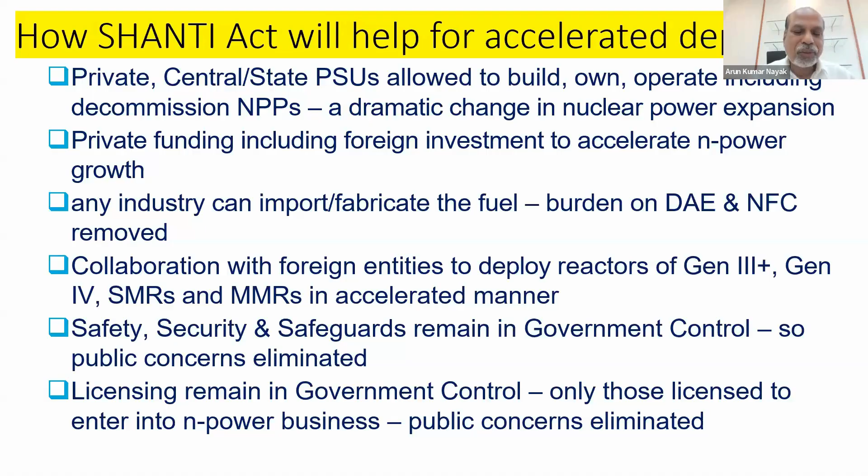Licensing remains in government control. Only those licensed can do nuclear power business, so public concern is eliminated. Radioactive waste is to be handled by the operator under AERB, stringent safety regulation. So public concern is eliminated.

AERB - there has been historically debate, that it is not independent. Now it has been established by Act, so the concern of independent functioning of AERB is eliminated. This Shanti Bill gives a much bigger edge for nuclear energy research and development, which is open up now. I believe in the next decade, lots of startups and collaborations are expected soon.

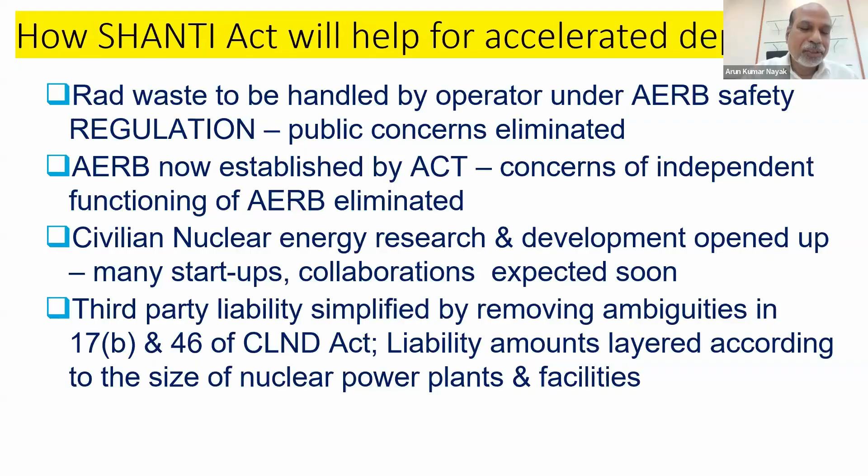Third party liability simplified, especially there has been a lot of debates. Supplier liability, Article 46 of the Liability Act, these are removed. So 100 gigawatt nuclear power is possible to me. It's not a big thing. There are 10 industries that step in. If we build 10 gigawatt, 10 nuclear plants, so 100 is possible.

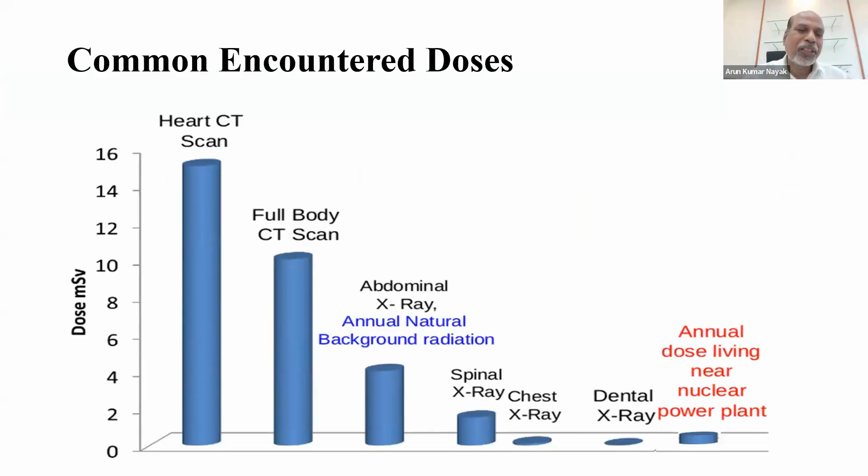The biggest enemy in the mind is the radiation phobia. If I go for a heart CT scan, I am not afraid to get 15 millisievert. Full body CT scan, 10 millisievert. X-rays, 4 millisievert. But when I build a nuclear power plant, the dose to the public is not in millisievert, it is in microsievert. But still, it's the talk of the town that nuclear is dangerous.

The danger word comes historically from Japan - the Hiroshima Nagasaki bombing, radiation leak, radiation exposure, and there is concern that people in Japan were victims of atomic bomb radiation. But nobody knows until now, let me tell you, we have never read what happened to the atomic bomb survivors in Japan.

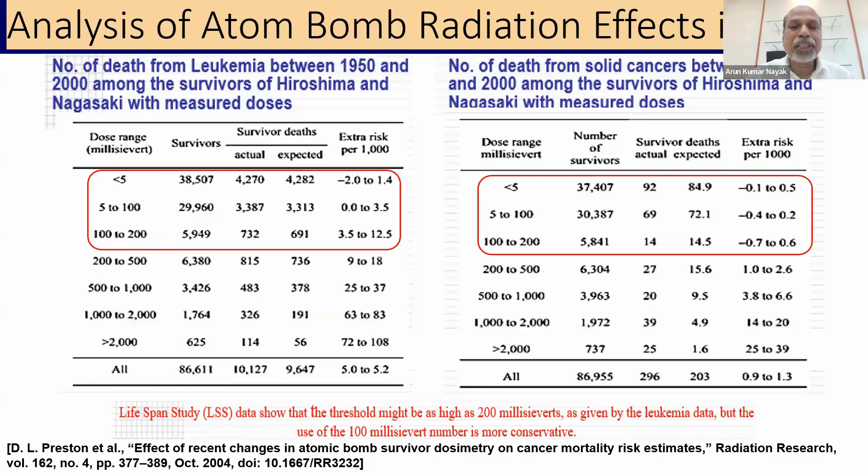So the question is, in Chernobyl, when the accident happened, the amount of radiation leak was tremendous. It was, in fact, much, much more lethal than the Hiroshima bombing. But the maximum dose which the public received here was hardly 100 millisievert, not even 200 millisievert. And people who were living inside the exclusion zone were all removed.

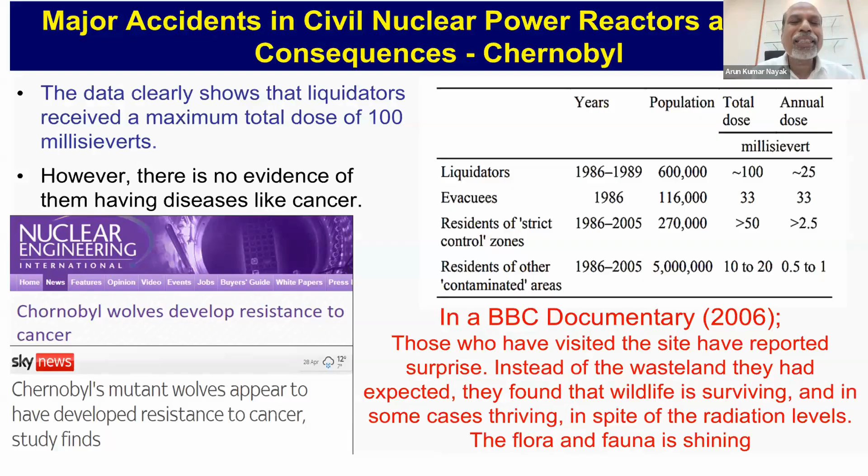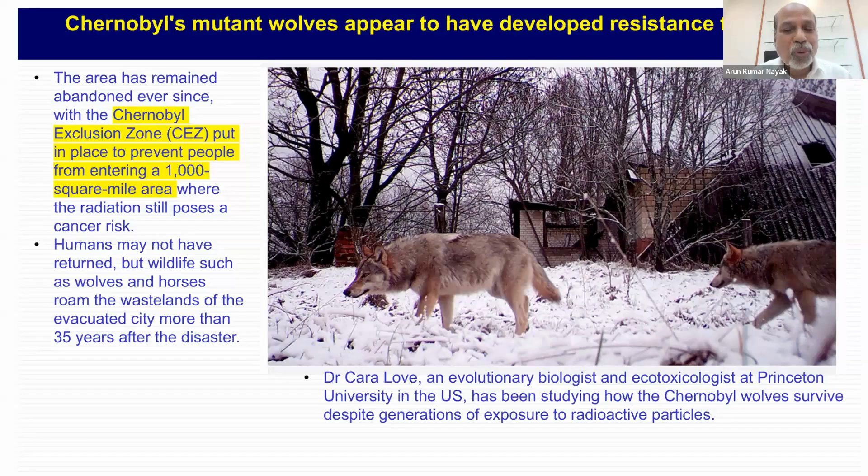But the animals, birds, they lived in the exclusion zone. What has happened to them? Did they die of cancer? There has been a lot of studies on that. Scientific studies have been done by American scientists, especially on the wolves living in the exclusion zone of Chernobyl. It showed that Chernobyl wolves are exposed to more than 11.28 millirem of radiation every day for their entire lives, which is more than 6 times the legal safety limit for a human.

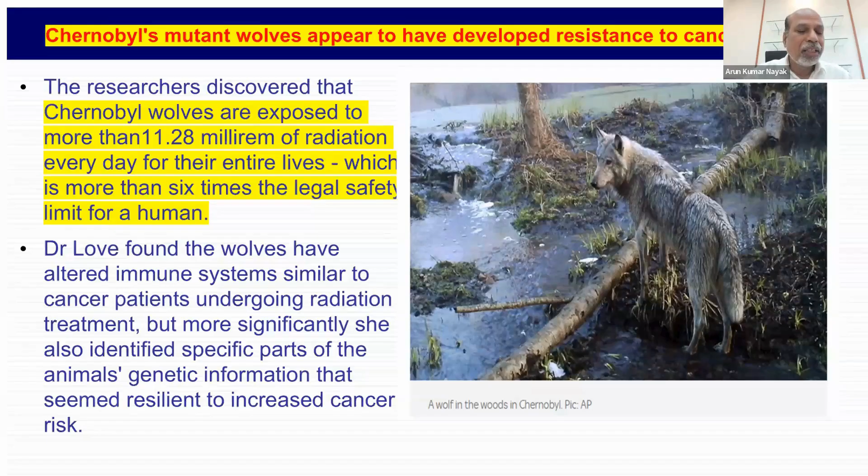And the scientists found the wolves have altered immune systems, similar to cancer patients undergoing radiation treatment. But more significantly, she identified specific parts of the animal genetic information that seem to be resilient to increased cancer risk.

What has happened in Fukushima? Fukushima nuclear accident 2011, three on-site workers died because of earthquake tsunami. A lot of fatalities happened because of the tsunami. 7,800 workers deployed received average dose of 7.7 millisievert, 30 received dose of 100 millisievert, and some could have received dose of 250 millisievert or more.

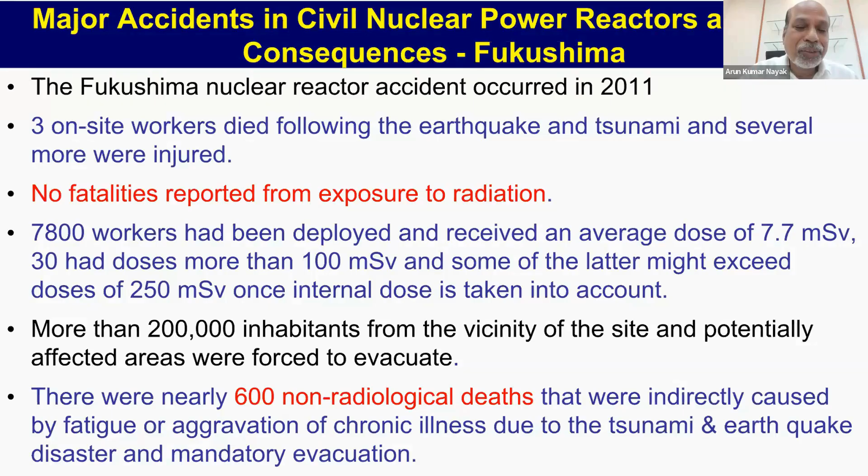More than 200,000 people were evacuated. There were nearly 600 non-radiological deaths, primarily because of the shifting of people from that place to isolated places. Old people, those who have a history of other diseases, because of the stress, they died.

This is where America is doing - there is revisiting of the clause called as low as reasonably achievable, the ALARA principle. The DOE is removing ALARA from the directives, including an official order saying that the policy was reviewed by the administration as overly burdensome to the nuclear industry with minimal safety benefits, aiming to align regulations with current, less conservative scientific evidence.

This is what I want to say. That's why I wrote this book called The Unreasoned Fear of Radiation. A lot of things you can see here. And if you go to France, next to the highways will be big sized nuclear power plants. It's something we all have to understand, accept, and move forward.